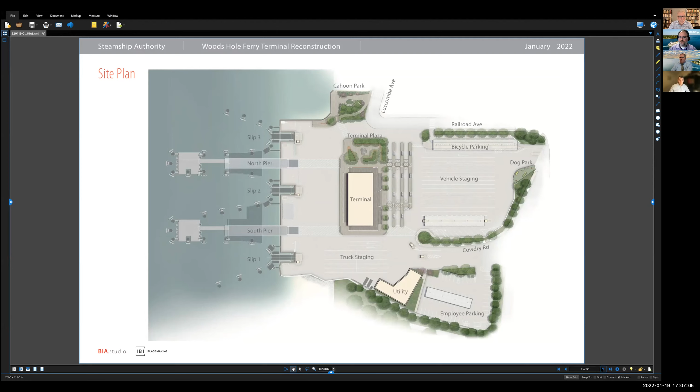Next slide. The area of the overall site is about 225,000 square feet, which equates to 5 football fields. And about 3/4 of the site is dedicated to vehicle operations. These elements all fit together like a glove, and the layouts are as efficient as possible. There's really not extra space in any of the spaces that we've designed. Pedestrian areas, which are walkways, plazas, and bus berths, are the next largest segment at 15%. The remaining 11% of the site goes to landscape areas, which are at 6%, and buildings, which are 5%.

Our work in this phase is really analogous to the design of a complex system such as a motherboard. You don't normally see this part of a computer, but the functionality of the device depends on the design and integration of thousands of components. And we're really putting the majority of our effort into these kinds of development efforts that you don't really see from the outside, but they're important to making the building work.

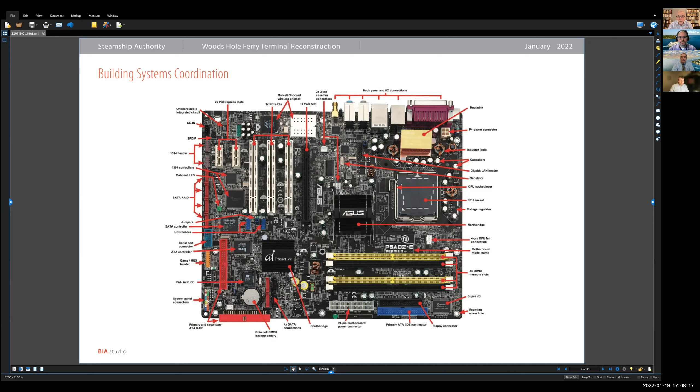Next. The terminal plan spaces also have not changed. But we have gotten into a lot more detail in this phase. The areas shown in white are the public spaces, and those in light blue are support. The public spaces are comprised of entrance vestibules on the east and west side, the east being the bottom. The waiting room is positioned on the north side, and the public restroom facilities are at the southeast corner.

The scope that we're developing in this phase includes floor, wall, ceiling construction types, door and window types, finishes, dimensioning, casework, and extensive coordination with other engineering disciplines, including structural, mechanical, electrical, civil, and landscape, as well as DD specifications formatted for public bidding.

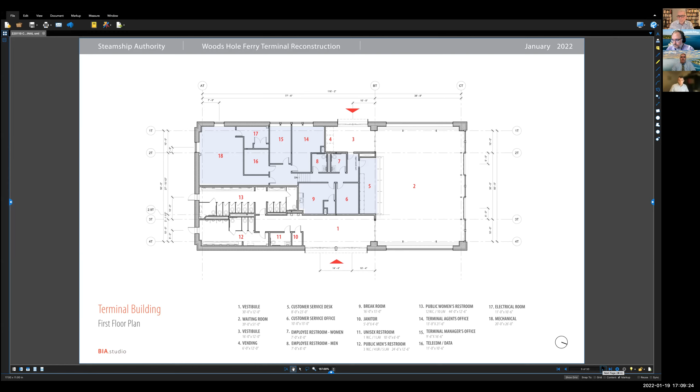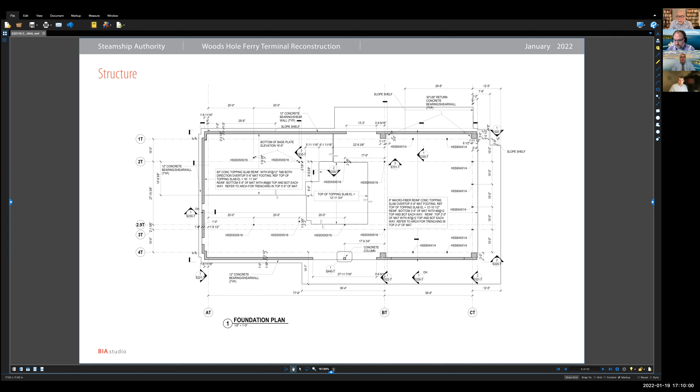This structural drawing indicates the extent of the 5.5-foot thick concrete structural mat slab, which extends out to the edge of the terrace where we have openings on the east, west, and north sides of the building. These are areas where we will use deployable flood barriers to elevation 17, and we need a continuous mat slab to resist hydrostatic uplift. The drawing also shows concrete wall and steel column elements that rise up from the slab, as well as things like dimensions, section markers, and notations throughout.

This HVAC drawing, which starts to look a lot like a motherboard, shows the air supply and return ductwork that threads through the ceiling. The mechanical room is positioned in the upper left corner of the plan. It's that rectangle in the upper left, not showing the equipment in there in this drawing. And it's important to note that all of our mechanical equipment is inside the building. There are no exterior compressors or fan units, as the geothermal system we're using provides all of the needed heating and cooling supply.

I want to point out a few things at the waiting room, and maybe Leanne, you can point to the waiting room. There are 10 air supply nozzles that are mounted high on the eastern wall that will provide primary heating and cooling for this space. And these will eliminate the need to run supply ducts across the ceiling. Return air ducts are located low in the east and west exterior walls and are routed back to the mechanical room within the concrete floor slab.

You can also see that there is a lot of ductwork in the restrooms in the lower left part of this drawing. These are configured to provide each individual stall with its own independent air supply as a way to minimize cross-airflow between stalls. Lastly, there is also an underslab radiant heating and cooling system in the public spaces that supplements the air system. This layout is delineated on a separate HVAC drawing, which we don't have for this presentation. Next.

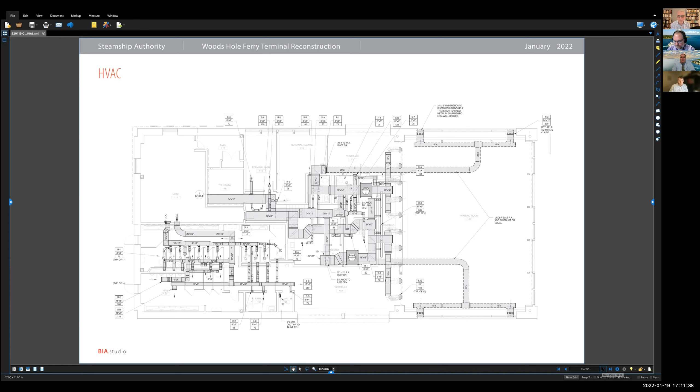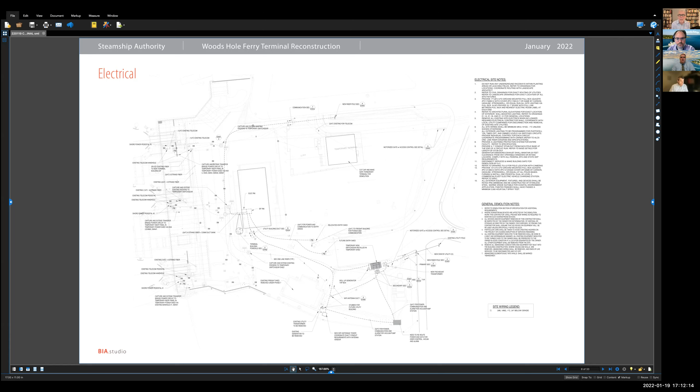Zooming back out to the site plan, this drawing shows where the temporary switchgear will be located in the employee parking lot, and from here, the new power feeds to the terminal and attendant booths. There is also a need to extend the power supply connections from each slip back to the temporary switchgear. Once the new utility building is constructed, those feeds will again be rerouted to the final switchgear location inside the utility building. Next drawing.

This drawing is what is referred to as a reflected ceiling plan. That is what the ceiling looks like if we look down on a mirror. It's a view up instead of down like most plans. In the public spaces, we are using a recessed 3-lamp LED fixture in the wood ceilings between glulams, similar to the image on the right. These will provide excellent overall illumination and will be subtle in appearance.

In the central support spaces of the plan, we have standard 2x2 LED fixtures set within 2x2 acoustic ceilings. And in areas with exposed structure, we're using suspended LED fixtures. To conserve energy, the code now requires that all interior lighting be controlled by occupancy sensors, which we have throughout.

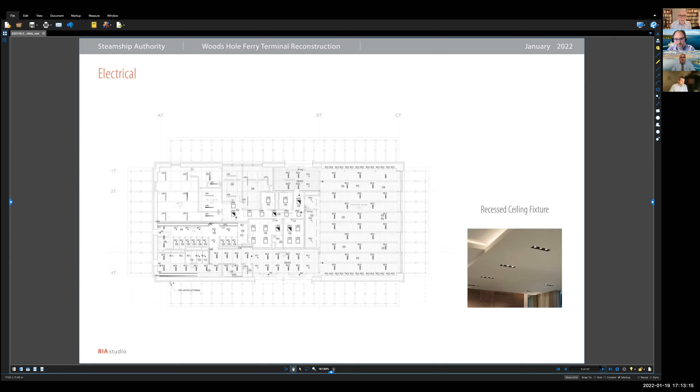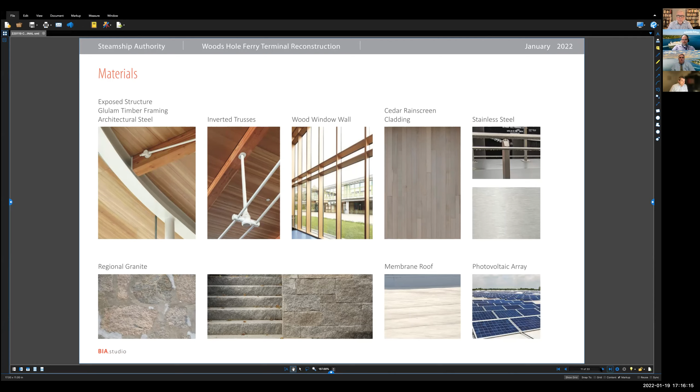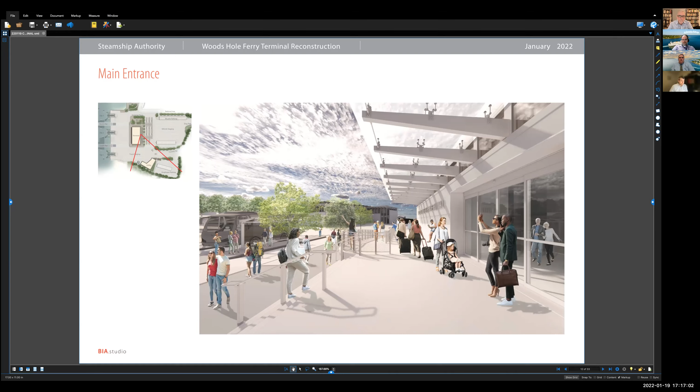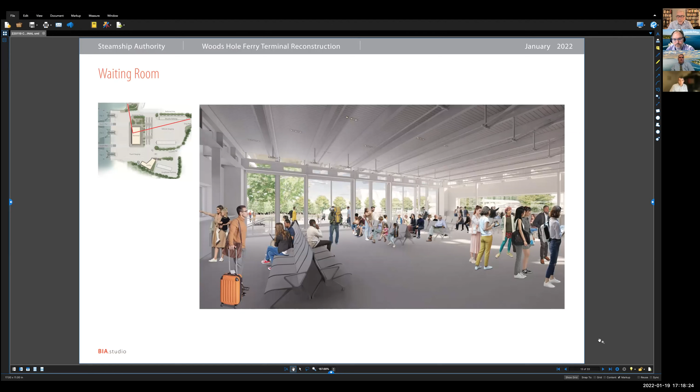The waiting room roof support system is comprised of a four-sided steel frame around the perimeter that supports the glulam and steel cable trusses, which Leon just described, that clear span this space. From the waiting room, patrons will be able to see what's happening on the east, west, and north sides, and there will be an interesting play of natural light filtering in throughout the day.

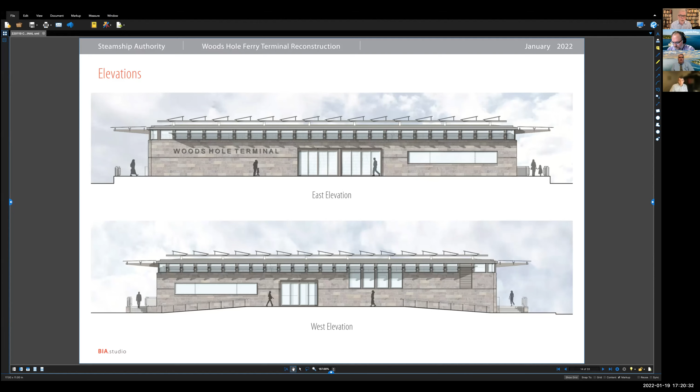The floor level here is raised 4 feet, and as a result, these windows have a sill height that is about 6.5 feet above the terrace. This permits the staff to have a clear view of the waterfront over the heads of people on the terrace below. Next slide.

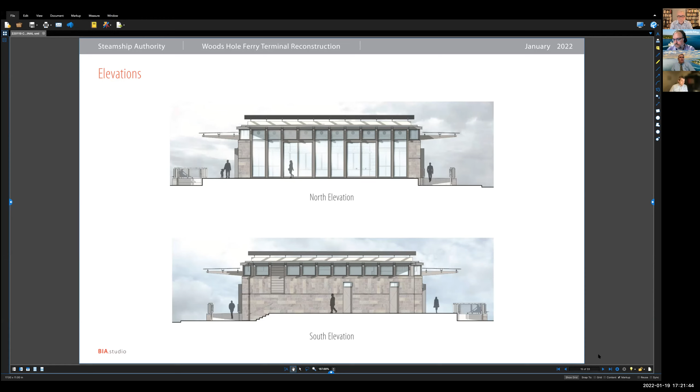During the design development phase, some of the scope that has been developing on this building, similar to the terminal building, includes dimensioning and finishes, as well as floor, wall, and ceiling construction conditions, door and window types, casework detailing, and the most substantive piece of that effort has been the coordination with the engineering disciplines, including structure, mechanical, electrical, plumbing, fire protection, civil, and landscape. We've also had input from the Falmouth Fire Department that's been incorporated, and that's informed the layout and access to fire department connections on both buildings, and also the building fire protection systems.

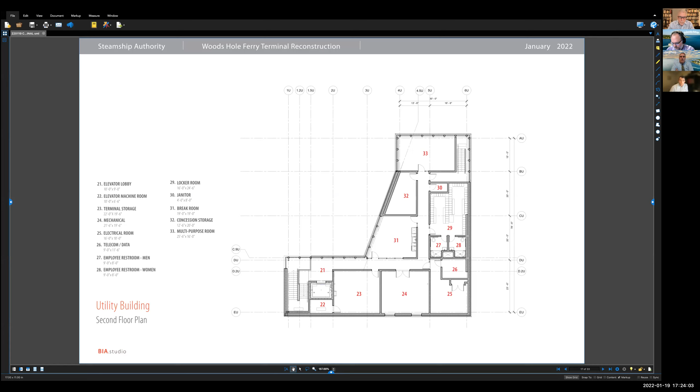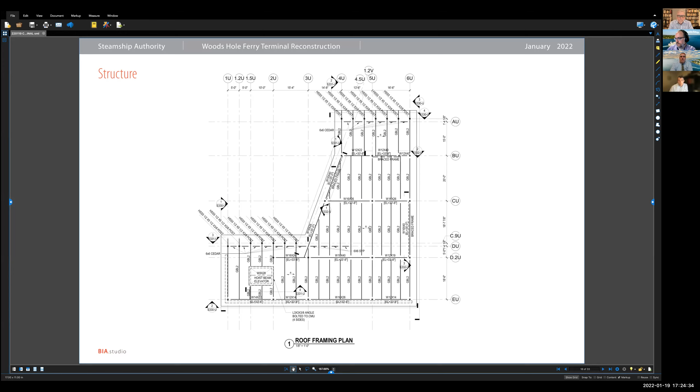The first floor of this building is largely unconditioned, so it doesn't require HVAC equipment or ductwork, the exception being the two entry stairs, which communicate directly with the second floor. And since all HVAC equipment is located within the building's mechanical room, we're able to achieve that, as Chris was touching on earlier, because of the use of the geothermal system serving the VRF. So there won't be any exterior rooftop condensing equipment needed in this building.

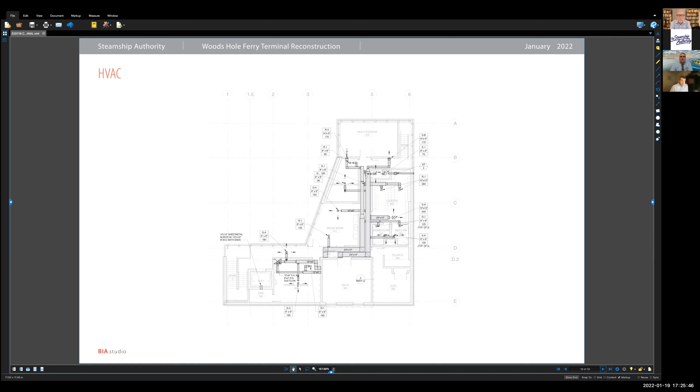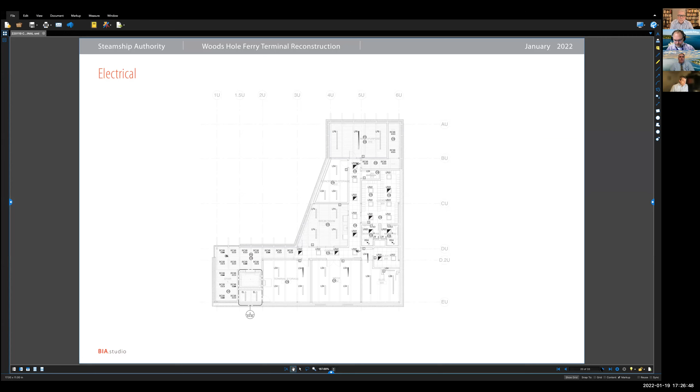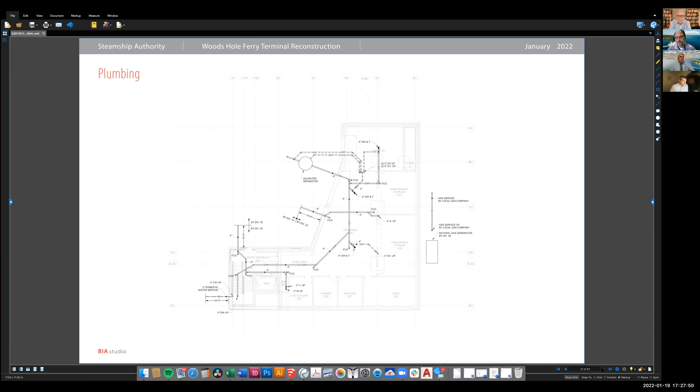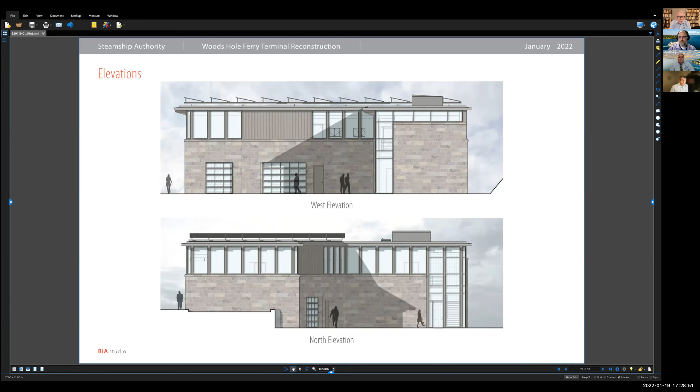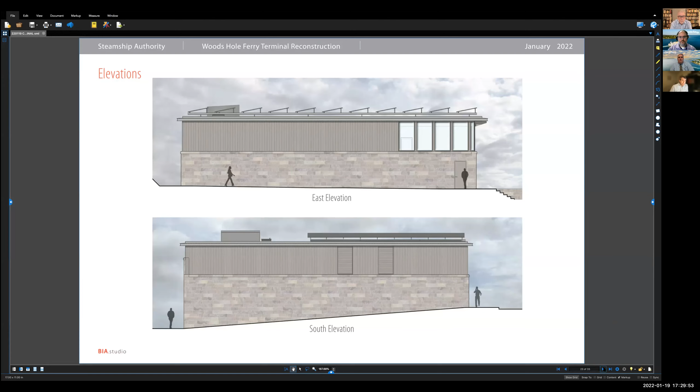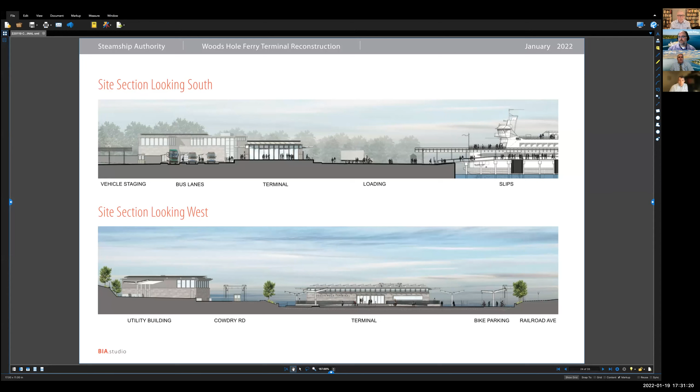To the south, on the left side of the image, a similar retaining wall and landscape buffer steps up to Cowdry Road. And from Cowdry, an existing stone wall then rises up to the employee parking lot with the utility building beyond. Also visible in the employee lot is the photovoltaic canopy there that supports solar panels and a stone revetment at the southern edge of the property.

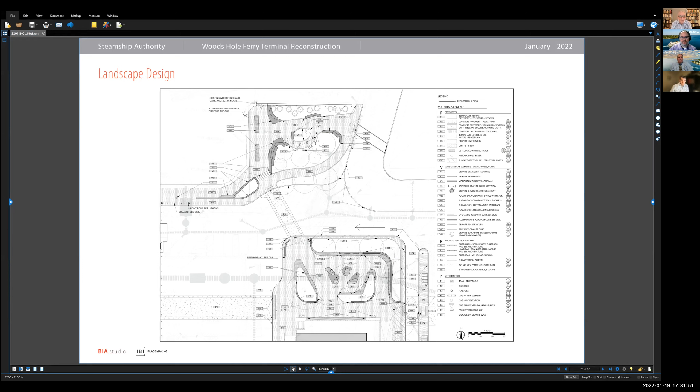So next we're going to shift over to the landscape design, which has seen some developments since the last presentation and has also benefited from some input by Arden Edwards and a group from the Woods Hole and Falmouth community. So this drawing is an overall materials plan that illustrates some of the different site elements in the plaza in Cahoon Park.

We're just going to zoom in on some of these elements to discuss them in a bit more detail. So looking at Cahoon Park, on the right side of the drawing, you can see a new crosswalk that angles across Luscombe Avenue to the existing access ramp near the Quicks Hole Tavern. From there, a new walkway slopes up to a landing that provides an accessible crosswalk connecting to the terminal plaza.

Along the northern edge of the park is a raised planter bed that abuts the existing concrete wall and cedar fence next to the Nishan Trust property. And the planter bed edges here will be raised about 8 inches using reclaimed granite material that was saved from the old park. And that same reclaimed granite material will be used to edge all the raised planter beds in the park.

Evergreen plant materials are planned for that northern bed, similar to the old park design. And we have an image later in the presentation just showing how that looked. In the center of the park, we're including a granite base to hold the historic horse trough fountain. Based on our meetings with Arden's group, we understand that the location we're proposing is very close to the original spot that horse trough historically sat.

Near the fountain is a series of bronze plaques set into the pavers, replicating the fish plaques from the original park as well. Also in the center, we're showing 4 post-mounted interpretive panels that sit in that central planter bed. The content for these panels is going to be developed in collaboration with SSA and community groups. And a number of suggested topics have already been identified by Arden's group.

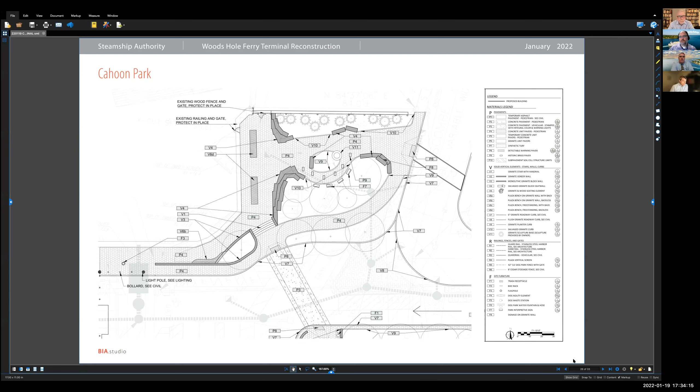Moving over to the plaza now, the crosswalk connecting the park and plaza is going to be a stamped colored concrete, which is lined on both sides with an in-ground light fixture that will make the walkway and pedestrians much more visible to exiting vehicles. The plaza is defined by a series of planters that are edged with stone walls and wooden benches, and the stone site walls will be the same regional granite as the buildings.

The planters have been shaped to define the northern edge of the plaza and present a landscaped edge to the village, facing Luscombe and Railroad Avenues. And the internal planters and seating are set up to create an exterior waiting space and also to preserve the desire lines for the primary circulation paths.

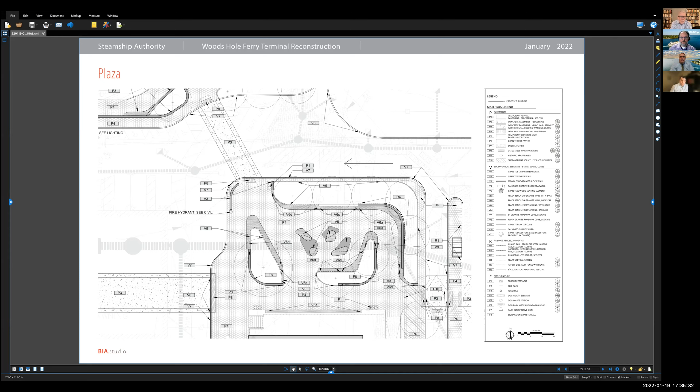On the right side of the drawing, a materials legend describes the various pavements, vertical elements, rails, and site furnishings. All pedestrian areas are going to have a concrete unit paver system, but the paver size, layout, and color are still in development at this time. Seating in the plaza and park is going to be wooden benches and granite block, which we have on the following slides in a bit more detail.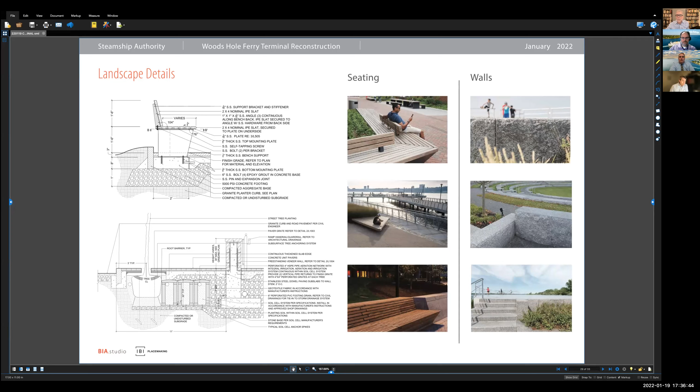We also heard a concern from Arden's group over planter maintenance and how that will be maintained. So it's going to be our recommendation that SSA contract for maintenance with a landscaper for the general care and upkeep that the park and plaza landscape elements will require.

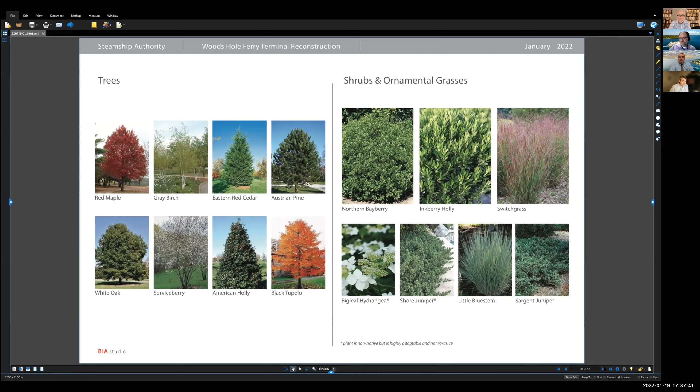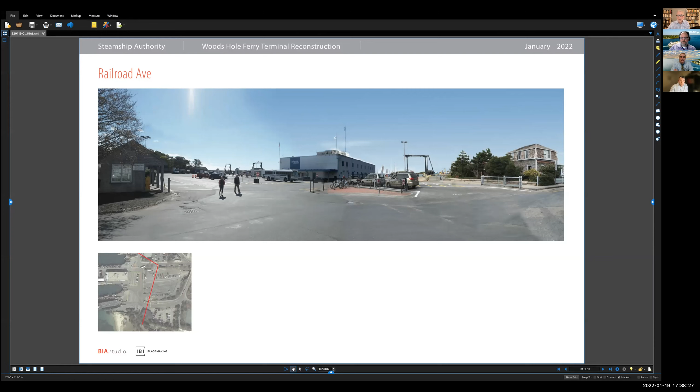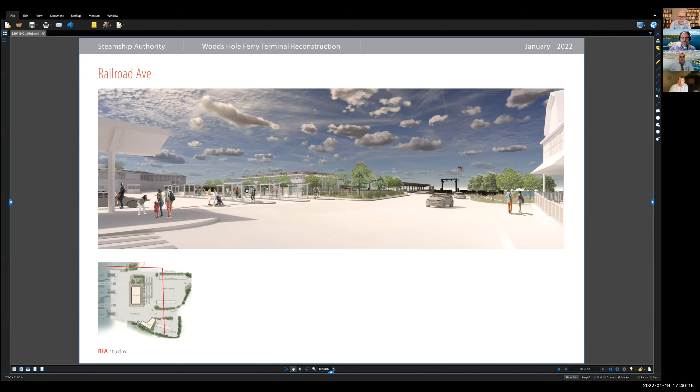And that concludes our presentation. So thank you, and send it back to Sean for questions.